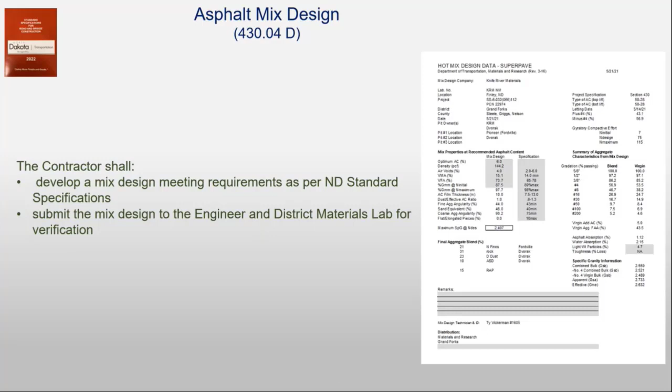One of the things, once you get all this stuff done now and you finally get sat down in the lab, you can actually look at some of these things on the mix design, as you can get a lot of it just right out of the cover sheet to start with. But the contractor has to provide us with a mix design before we start, and then the district materials lab verifies those mix designs to make sure they're ready to go. And so hopefully that's all been done, and you have a copy.

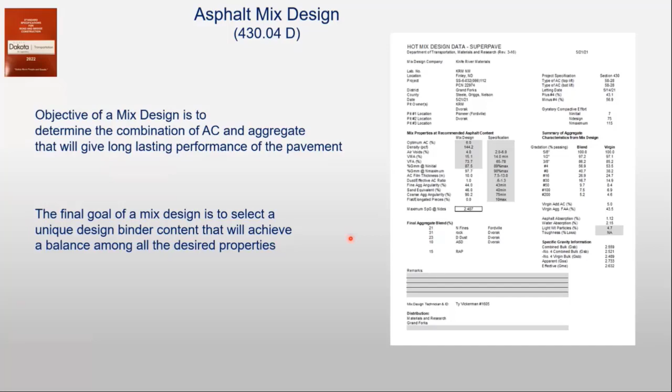So basically, the objective of a mix design is to determine the combination of AC and aggregate that will give a long-lasting performance of the pavement. So the final goal really is to select a unique asphalt cement binder that will achieve the balance of all these properties we want it to meet. And there are a lot of properties with Superpave.

So I just want to go over a couple of things from the summary here, just kind of highlight them. So the inspector is going to know what kind of binder they're going to use on the project. They're also going to know what gyrations. Now, 75 has been fairly standard here for many, many years to run these gyrations in the gyratory for the mix. But nowadays, there are a few jobs out there that actually have less than that. So you want to make sure you check that.

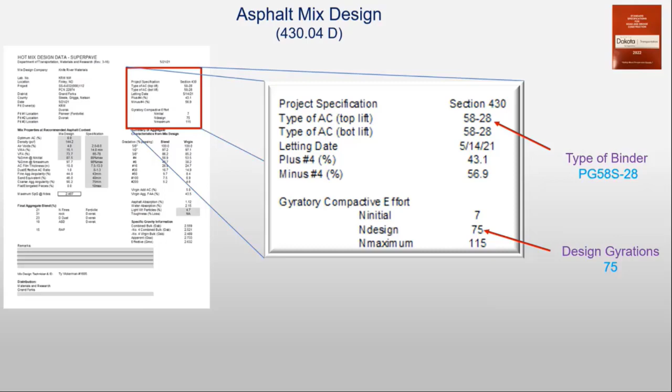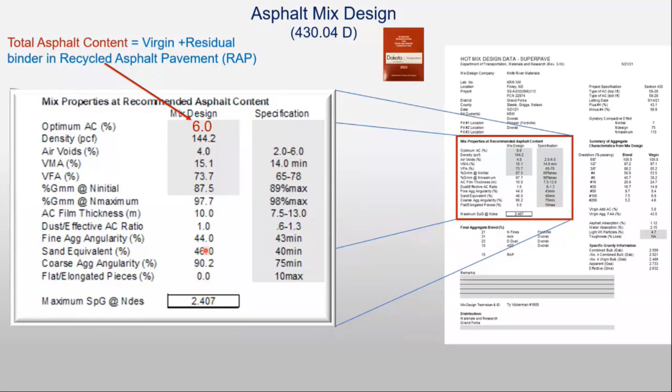And also, this particular segment here talks about the total amount of asphalt cement that's in the mix. And this may include any residual binder that comes from the RAP, or the recycled asphalt pavement. And the rest of this stuff here basically is showing that it meets all the specifications. This area here will tell you, for instance, this project, the example I showed here, actually does have some recycled asphalt pavement in it. Of the total 6% that we showed in the previous slide, 5% is going to be virgin AC oil.

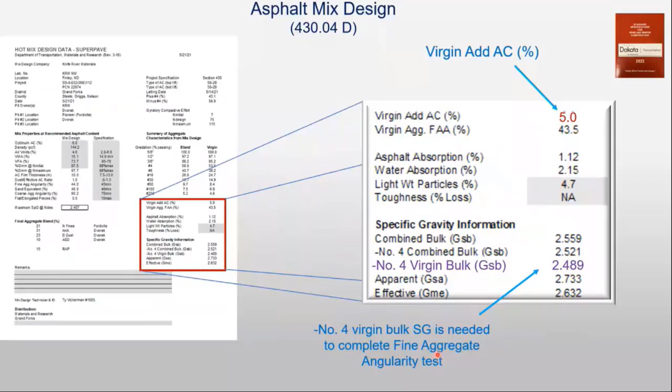And this will be your target, that when you start the job, the contractor is going to have to adhere to that, unless there's some sort of target change later on. But they'll start out with this, and that's what they want to put in the mix, 5% by weight of the mix. And so another thing you want to get is some of the specific gravity information here to start with, so you can do some of your physical property testing with it.

And so these are the blends that are used, and it's a good thing to make sure that these are the blends they're going to start with. And if not, then you need to communicate with someone to find out why we're not starting at these. But here we have all the different components. We got some dust, rock, natural fines. We also have our recycled asphalt pavement, which is 15% of the mix.

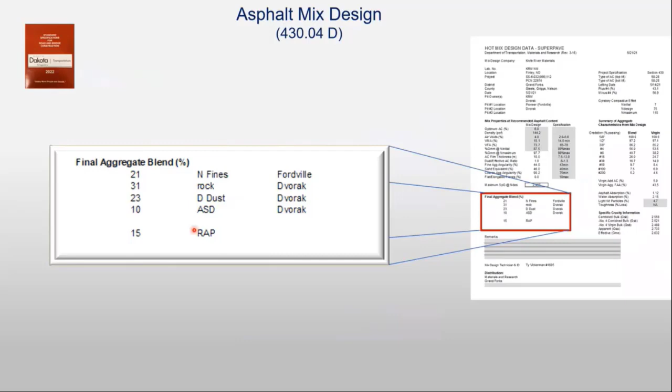And this sheet here, I will just basically talk about this virgin gradation here. This is a target value. This is a result of probably months of quality control testing that the contractor has done during the production of the aggregates. And so they're pretty confident that this average is about where they're going to be running on their tests when they do gradations out there. And we're going to be doing gradations here too.

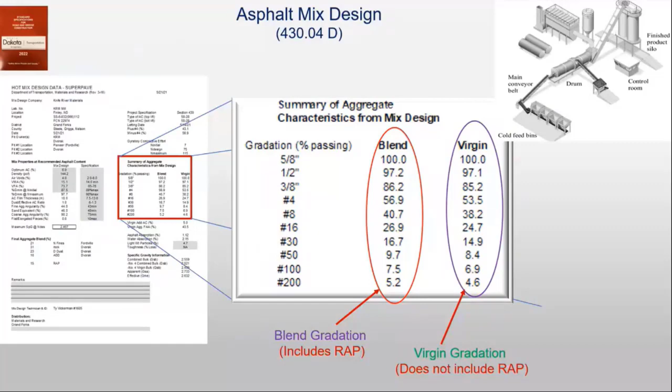So what we want to do with that now is, there's a table in 430 that talks about single test and moving test averages. If we expect the contractor, for instance, to run and hit these values right on the button, it isn't going to happen. And the reason is because of the inherent variability of the material. And so we will allow a certain range for them to work in. And that's what this is, the single test control limit.

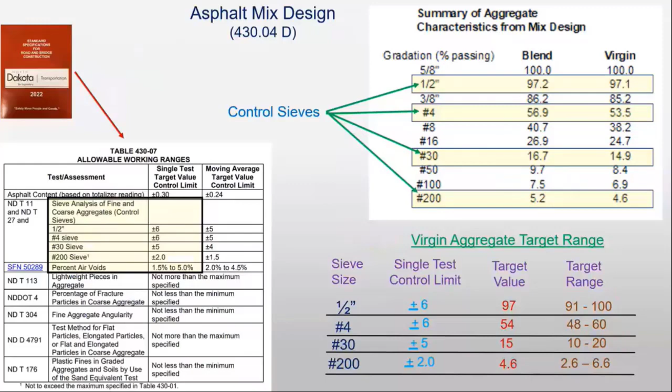Now, we don't take every sieve here either. We just take control sieves. The control sieves for Superpave are 1/2, 4, 30, and 200. So those are the only 4 you need to worry about. And so what we do then is we take this, and this is something that you should do for your own good. It might be done already by the contractor, but make this little table out, and for instance, on the 4, we would round that off to 54, and then you would go plus or minus 6 of that. So this is the range that the contractor will work in when they do gradations, and you too, as an inspector or tester.